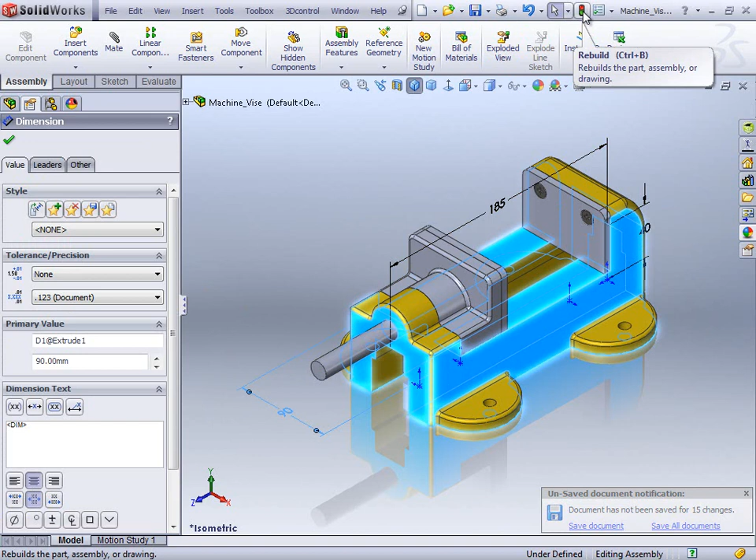So let's make a few changes. Let's go into base one, and if I double click on the extrude one and change the 70 mil, let's double click on it and change it to 90. Don't click on the update yet, don't click on the rebuild just yet. I click OK on that.

And extrude 2, you can see the little rebuild symbol, hopefully you can see that here, just telling us that it needs rebuilding and this whole base feature needs rebuilding.

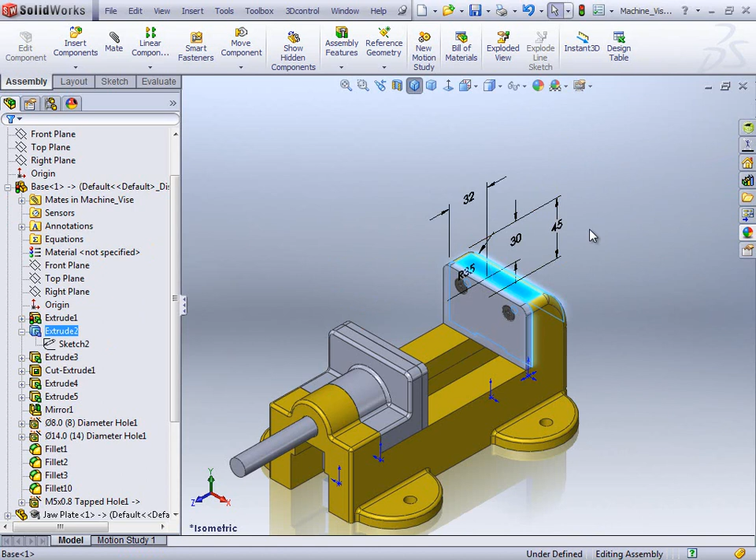Let's not just rebuild it yet, we have a few more changes to make. So if I double click on the extrude 2, we're going to change the 45 mil dimension to 65. Okay on that.

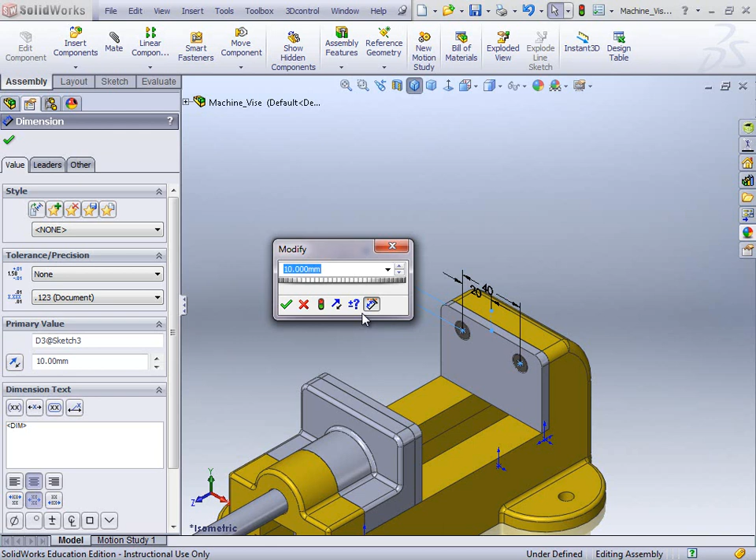Then we're just going to change the screw hole itself. I can minimize that. So on this countersunk screw, if I just double click on the sketch, we can change this from 10 mil to 20 mil. Click OK and accept that.

And you can see that a lot of stuff needs rebuilding. So if we just zoom out so you can see the whole thing as it rebuilds. Now if I press Control B or click on rebuild, magically it resizes.

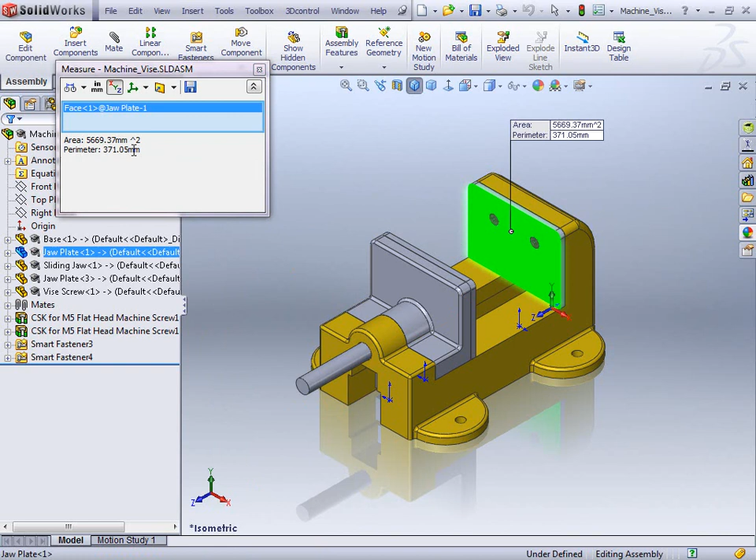If I was to kind of measure that area again like it suggests in the book, so I just measure the area of that face, you can see it's around 5669 square millimeters. As I say, close to 600 or 6,000 square millimeters. A little bit away, but you can see us there - we've kind of updated that part.

You can save the changes on that part. Just on pages 34 and 35 of the manual, just to explain that little bit, on the bit where it hides the fasteners and saves external files - we've already done that by setting our options.

If I go back to assemblies again, by setting this option, there's no need for you to worry about that. So once you set that option, save new components to external files, I wouldn't see why you wouldn't want to have that checked anyway. If you're going to create a part, you're going to want to create it as an external file as well, not just save it in the assembly.

So that little bit on page 34, you can kind of bypass, or unless you want to go back and maybe uncheck that box and see how that pans out, but you'll end up with exactly the same result as we have at this stage. Okay.